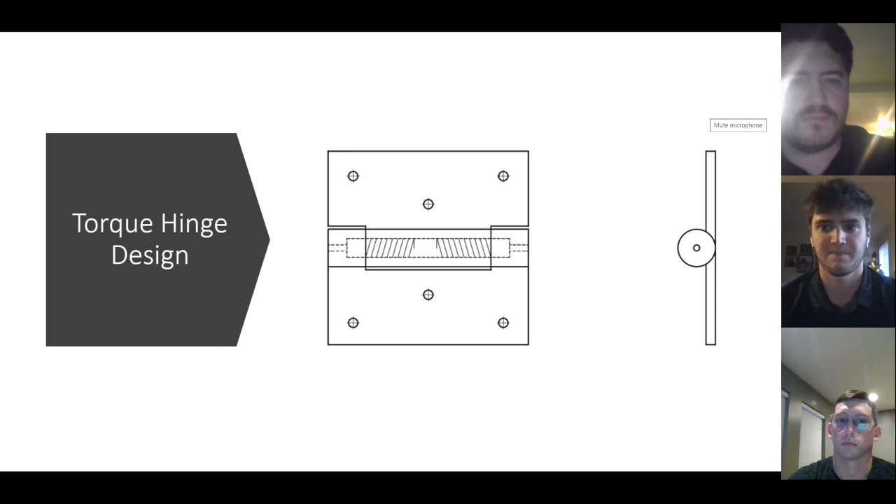Here's our torque hinge design after consolidating our preliminary CAD designs. Off of that design server, here are some door specifications.

For the door, we had to calculate a moment arm to figure out the load that the springs have to undergo, and basically the torque of the springs has to overcome the maximum door moment to achieve a good torque hinge. We're using the technical guide from Dell to get some of our design variables.

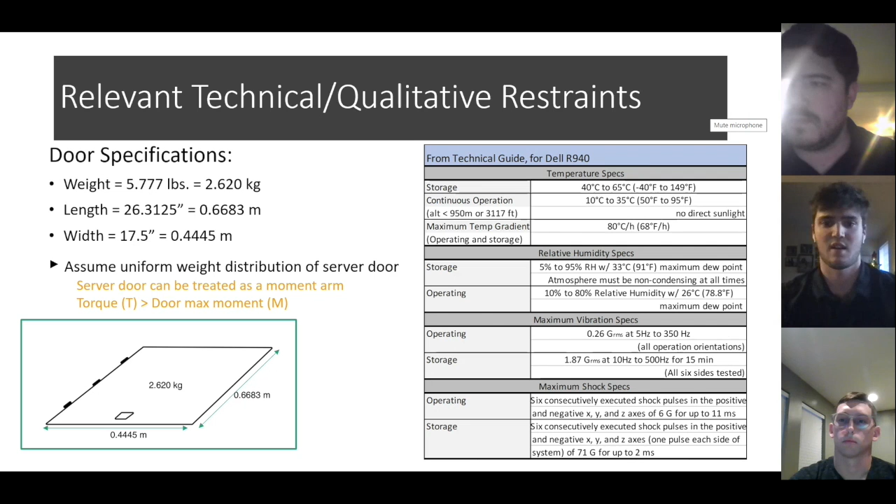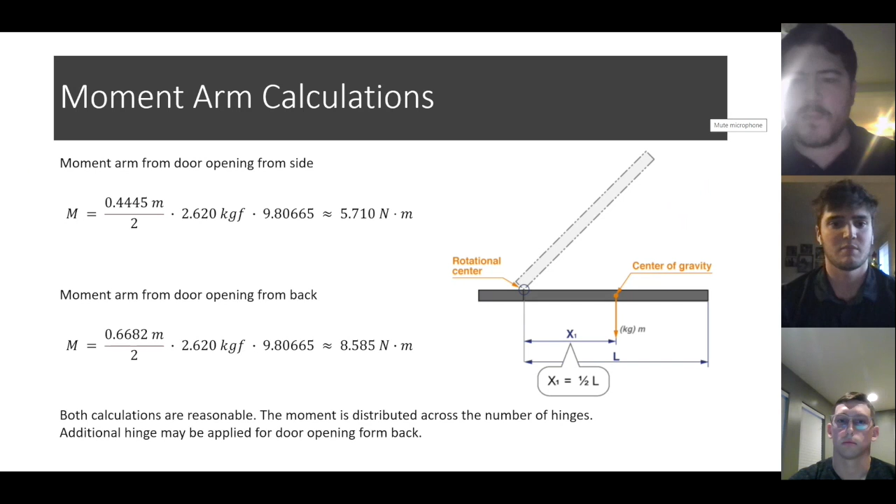Here are the moment arm calculations. We actually opted to open the door from the side just to achieve a lesser moment arm and possibly get a smaller hinge design, but we could also include extra hinges and open it from the back. These are very realistic moment arm calculations to distribute over the number of hinges.

For our initial spring design, our plan was to use 2 springs, hoping to overcome the moment. We had to make a few initial design values shown in the chart, and from those values we were able to calculate our wire diameter, outer diameter, and all the geometry.

We were able to calculate the expected stress from our door on the spring. When we attempted to calculate the design geometry for the spring, it ended up having a number of coils of 0.002 and an inner diameter of negative 2.95 millimeters, which is impossible.

So we continued to try and find a different spring material that would meet our needs. However, we were not able to find the design stress values to custom make a spring.

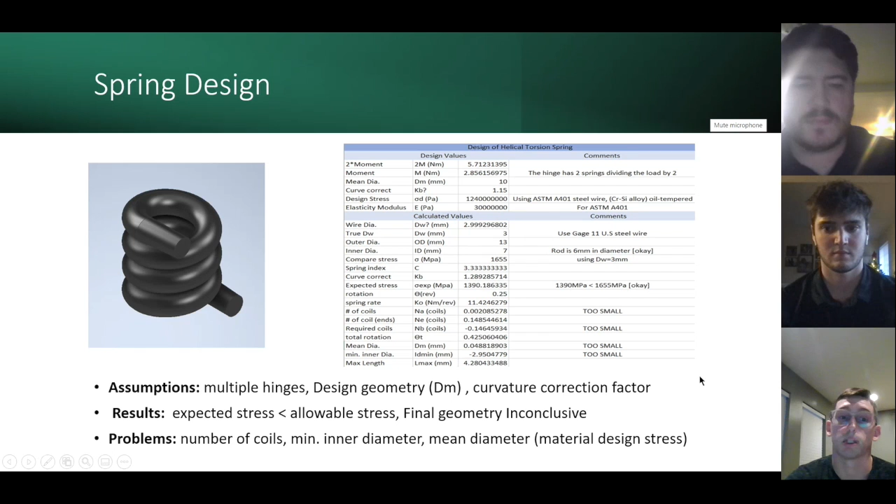For the rod design, we needed it to be small enough for the springs when they move to actually clamp down on it. So what we had to do was first plot out the kind of forces that would be acting on there, and we thought it'd be mainly shearing forces going downward, shown in the bottom left photo.

Then we chose our material, the SAE 1020HR hot rolled steel, which had an ultimate tensile strength of 379 megapascals, and we used that to find the actual endurance limit, then divided that endurance limit by a design factor of 4, which is generally used for more ductile materials, including this one.

It actually was a little bit of an overkill as far as the type of material. Steel is very strong, so it wouldn't even be close to failing. So we would probably downgrade it to either an aluminum or some other material we can actually 3D print off.

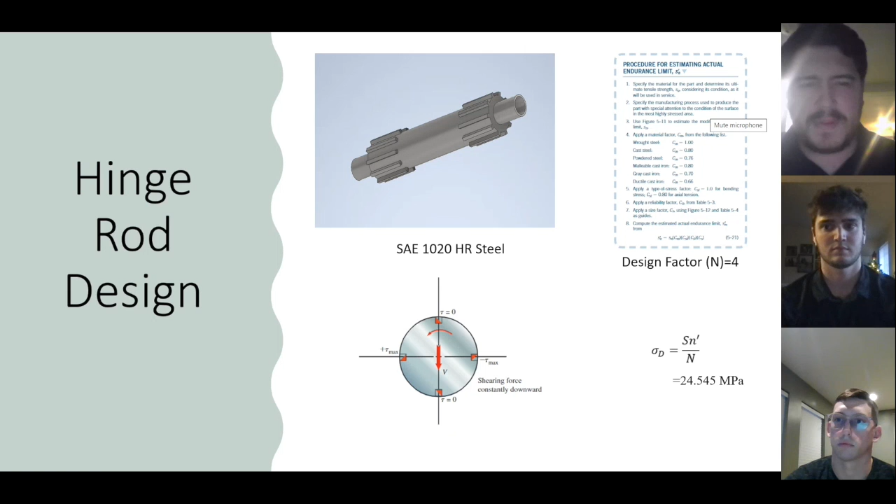This is what our final assembly looked like when we put it together. On the left was our final CAD designs, and when we put it all together, that's it on the right.

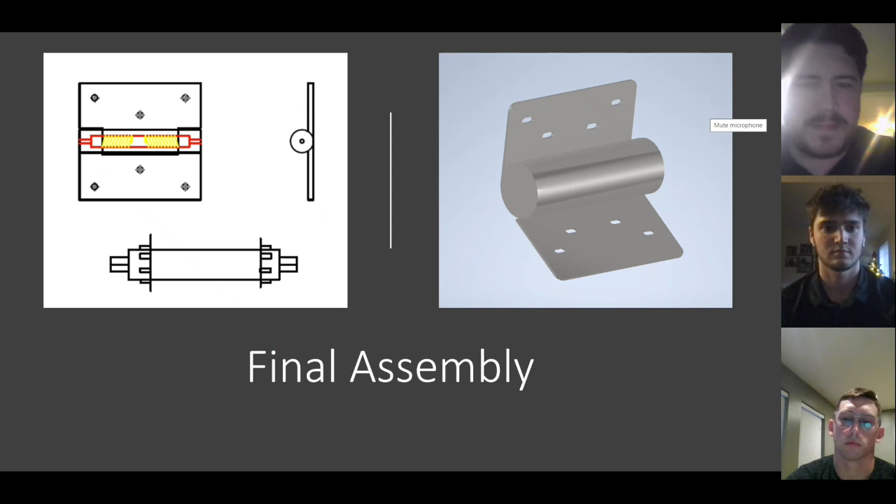And this is our final production drawing, and it got a little crowded in there, so I put the springs and separated them all out separately so you could see everything. The maximum diameter we have on the outside, as the hinge, as you can see right there, is 13.6 millimeters, so you can tell it's very small inside the server.

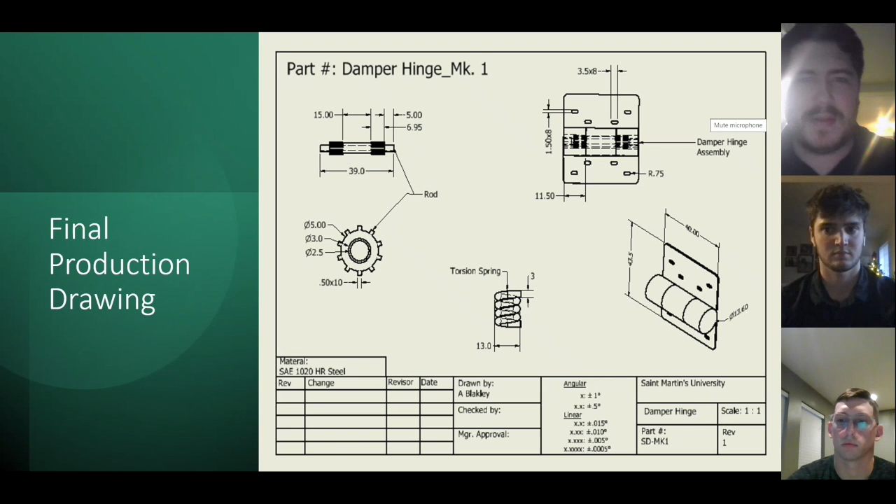So these are some of the codes and standards that we're following to make sure that what we're planning out actually can be replicated and comes out exactly the way we want it to in the end. First, we decided to use the metric system. In general, it's just the easiest for us—it's what most of our education has been geared towards.

And then ISO 9000, which is basically a way to do quality assurance, and we have to pay a lot for it. We're actually using one of the classes me and Austin are taking, new product development, where we go through various steps, and a couple of them are design verification and validation. Those focus on making sure that what you start with and your goals are met throughout, by checking every step of the way as you go to the end.

The other codes and standards we use are BICSI 002, which are standards based on how a server room should be set up—all the rules and regulations of what can be in a server room. Also, our spring is built to ASTM standards. That's from the company, a standard that will always be used.

Some major roadblocks and risks involved: the spring is actually way more expensive than we initially predicted, so we're figuring out how to buy those in bulk to drive the cost of the springs down.

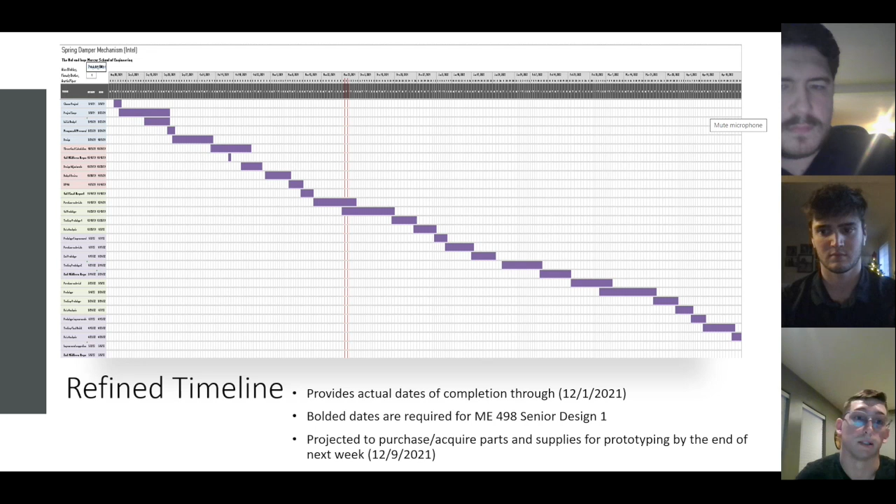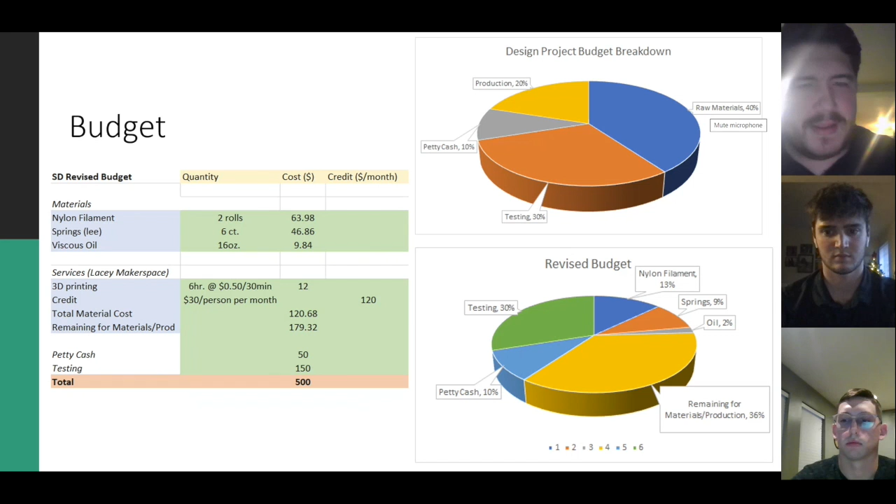We set aside a little bit of petty cash just in case for emergencies, as a bit of a cushion. And using this, as far as materials so far, we're under budget right now.

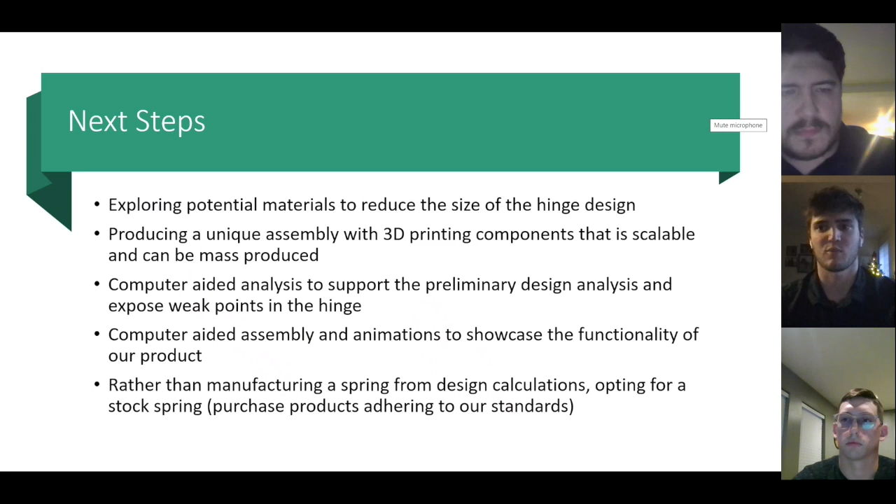Some next steps heading forward are exploring potential materials in our hinge design. We're really looking into doing some 3D printing, using materials such as nylon—a definite possibility—to drive some of those design calculations down with their strength and lightweight characteristics. Also applying computer-aided analysis to our designs, finding weak points, and confirming that our design is sound.